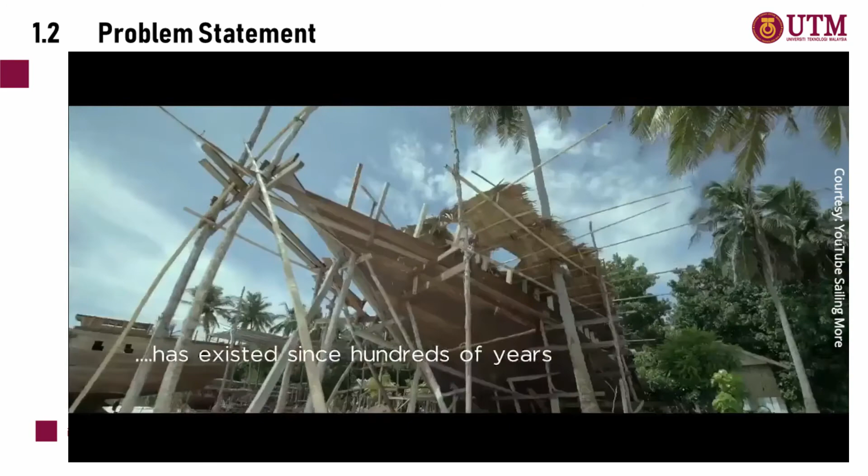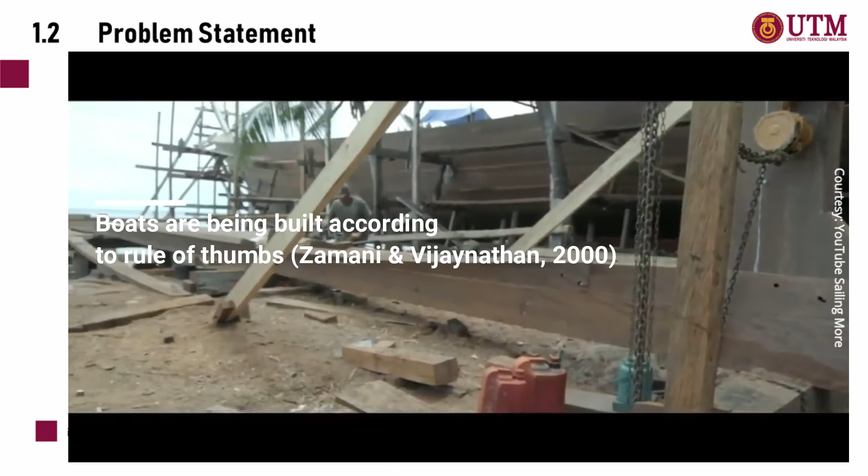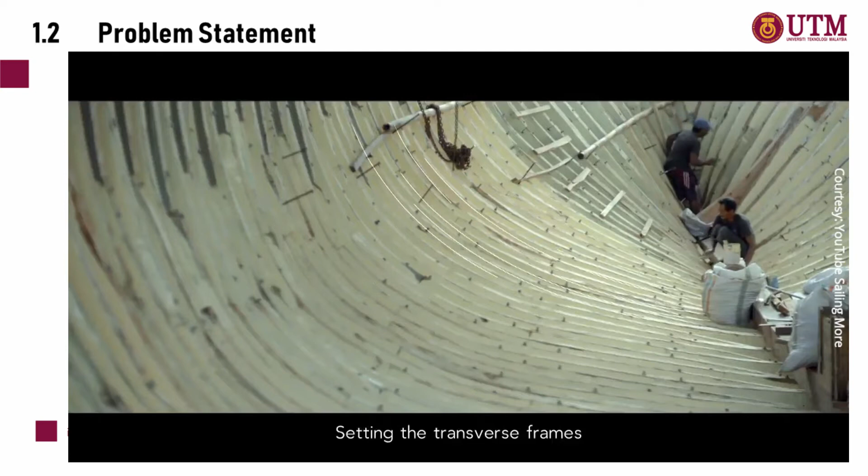In current practice of traditional boat building, engineering calculations are being omitted and the boat will be built according to the rule of thumb. The traditional method does not have any approval nor guidance from any naval architects, and it allows builders to design any vessel freely. Common technique applied by traditional boat builders is that boat frames will only be made after the hull has been constructed and completed. Clearly, this traditional technique may bring failure to the boat's structural strength. In other words, traditional boat building technique is like a trial and error design process.

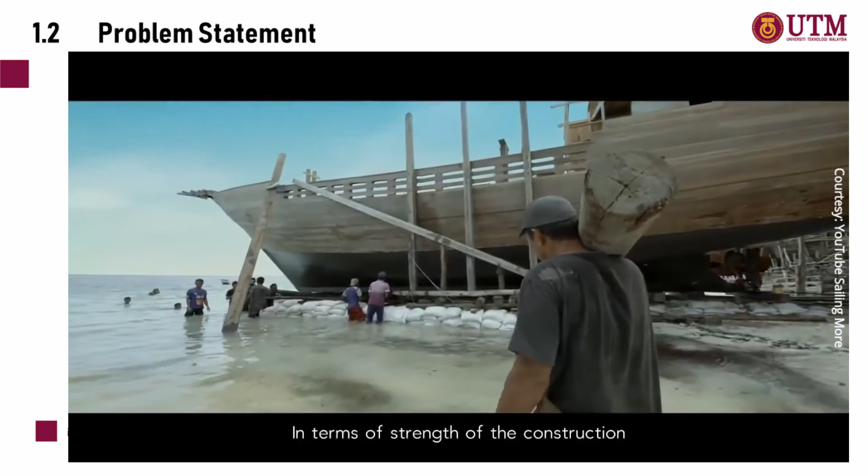Hence, the idea of this research is to propose a simplified method of structural strength assessment for small vessels. The simplified method could then be used to assist local boat builders and boat designers. Based on the previous problem statement, the research objectives are to develop a simple method of assessing structural strength for small vessels and to verify the effectiveness of the developed method.

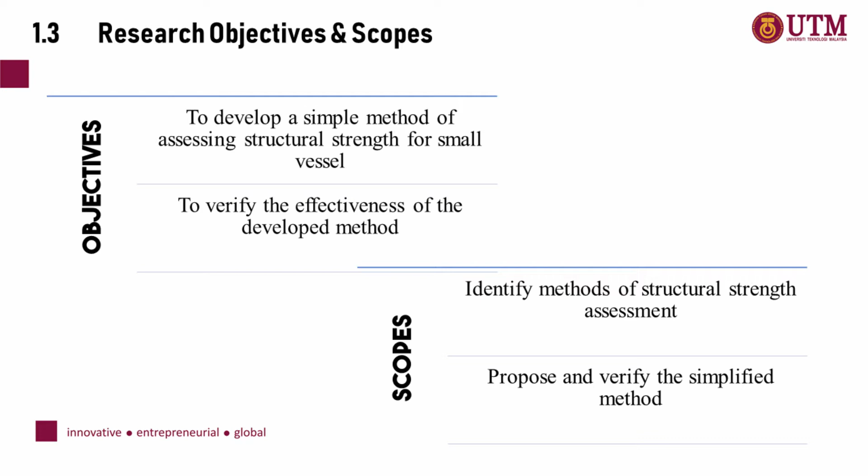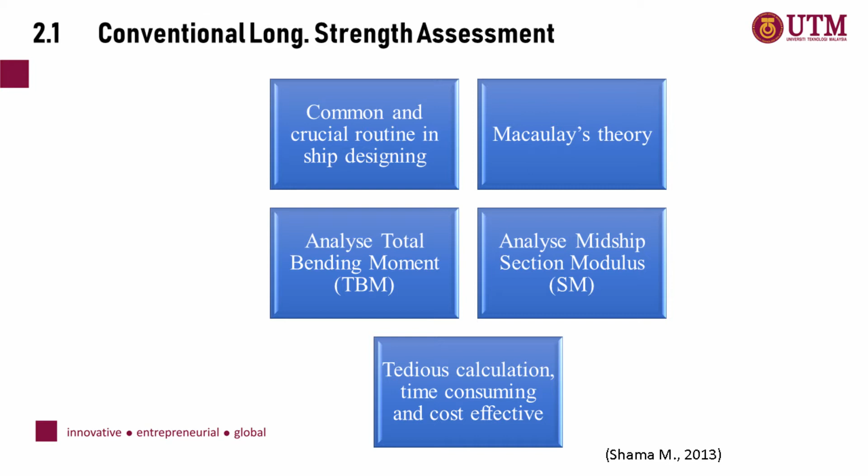The strength assessment is important as mentioned before, and this assessment is a compulsory routine in ship design, especially for large size vessels such as merchant ships. A common theory being used in longitudinal strength assessment is Macaulay's theory, which helps us analyze the total bending moment and the midship section modulus for a ship or a vessel.

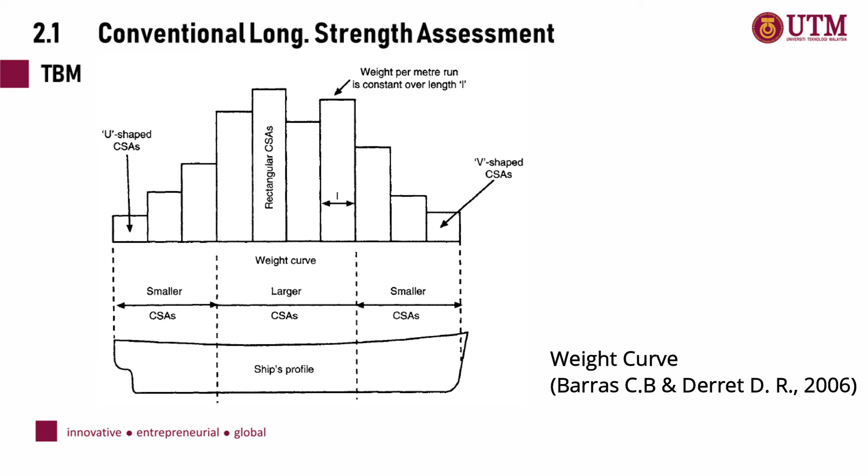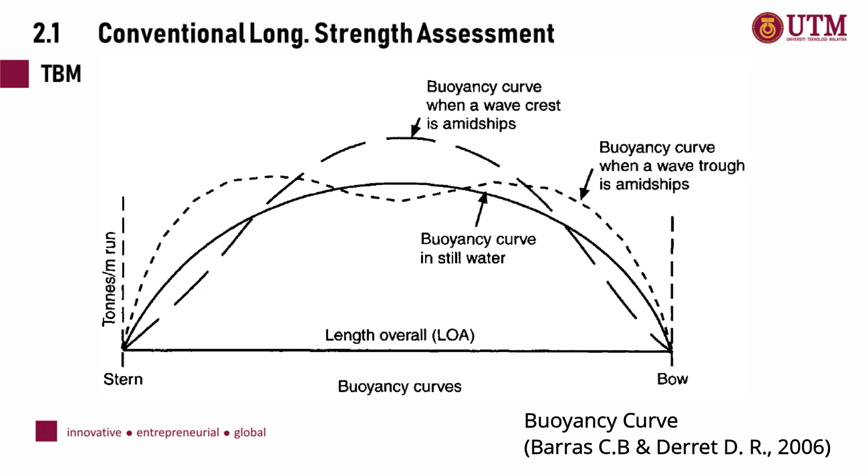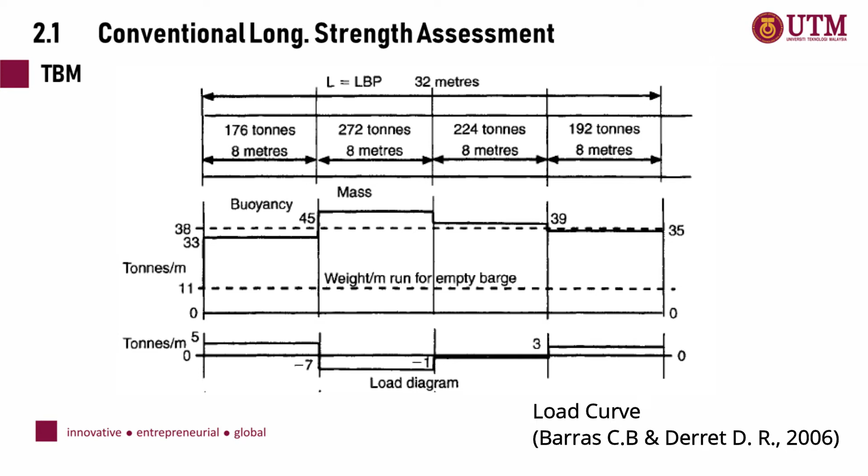In total bending moment analysis, strength curves are very common and each strength curve is strongly related. First is the weight curve, which shows the longitudinal distribution of the weight in the ship. Second is the buoyancy curve, which presents the longitudinal distribution of the buoyancy. Third is the load curve, which shows the difference between the weight and buoyancy ordinate of each section throughout the ship's length. The last one is the shear force and bending moment diagram, where this diagram presents the highest bending moment occurring at a particular ordinate of the ship section.

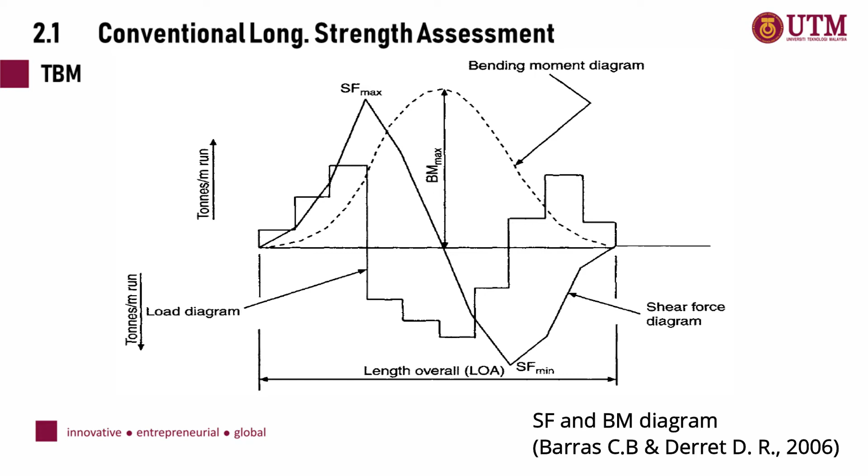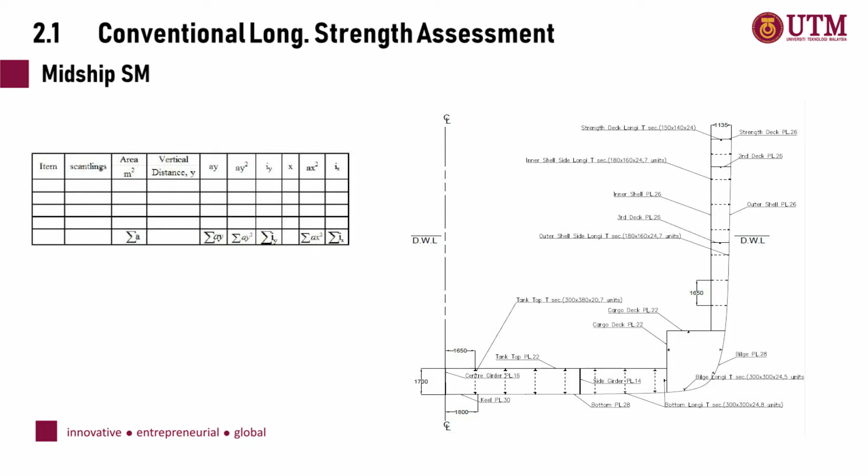After that, to determine the midship section modulus, one must refer to the midship scantling list or midship scantling table. Then, geometrical and flexural properties for each scantling are calculated in order to determine the midship section modulus.

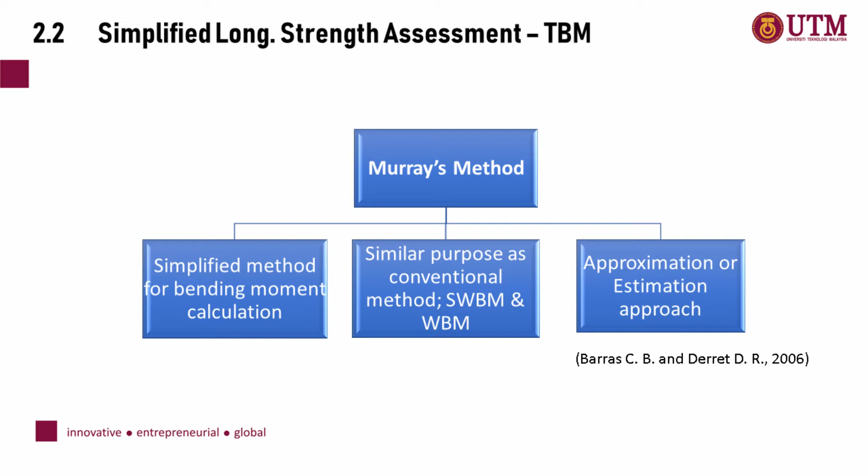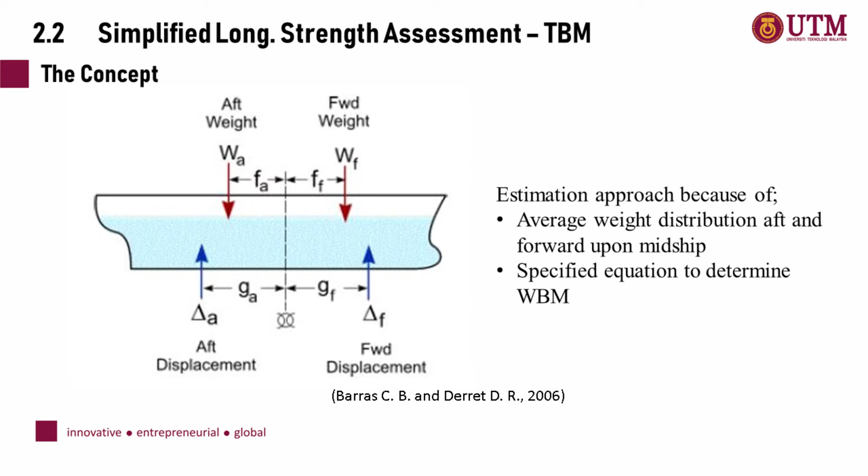We shall now proceed to the simplified strength assessment for total bending moment. Murray's method has been chosen and adopted in this research for the total bending moment simplified strength assessment. It is similar to the conventional method as this method is also used to determine the total bending moment. Murray proposed this method as an approximation method because average weight distribution aft and forward of amidships is used to determine the still water bending moment, while a fixed equation has been developed by Murray in order to determine wave bending moment.

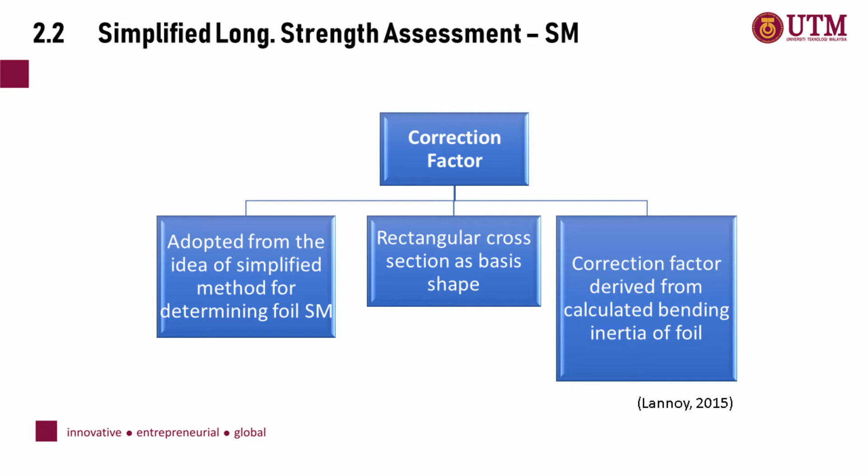Next, we move to the simplified strength assessment for midship section modulus. Currently, there is no simplified method for section modulus analysis. However, research has been done to find hydrofoil section modulus using a simplified method recently. The simplified method has been developed using the correction factor concept. The correction factor is derived from the calculated bending inertia of the hydrofoil. It is presumed that the same concept can be applied to the midship section modulus. Right now on your screen is an overview on how the correction factor works.

The flowchart shown is a quick overview of this research methodology.

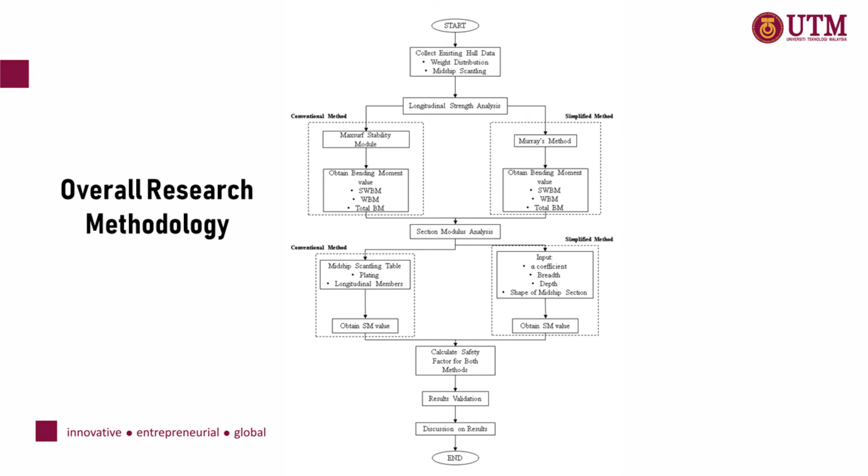For your information, two models were used in this research. First is Model A, which is from an existing hull. The particulars are shown on the screen. Model A is a patrol boat owned by the Department of Fisheries Malaysia, having a 300 horsepower outboard engine. Rhinoceros 5 has been utilized to assist the 3D surface modeling of this model.

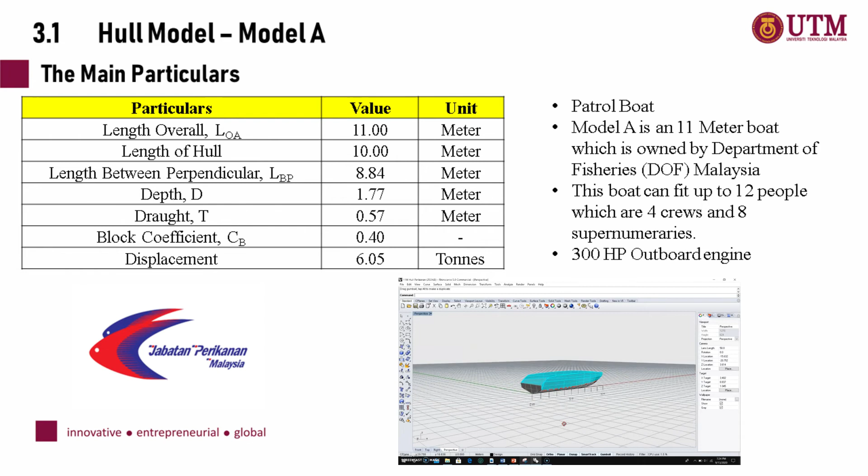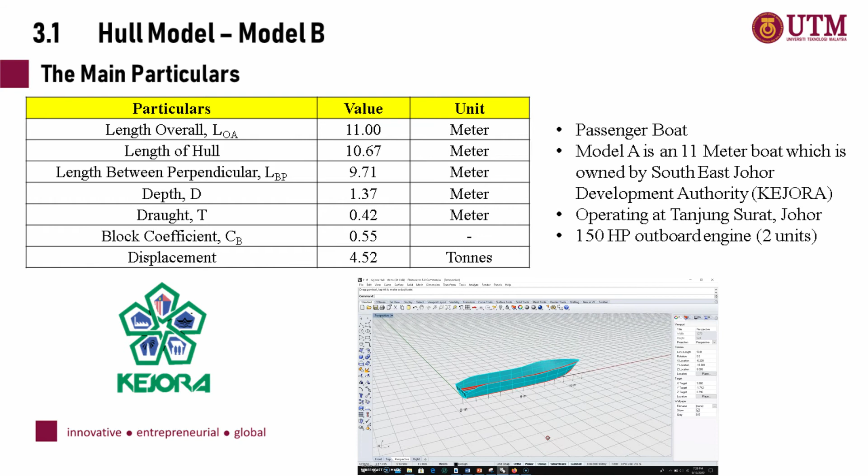Next is Model B. Model B is a passenger boat owned by Kejora, and this boat is operating at Tanjung Surat, Johor, which is located in the Pengerang district. This boat has two units of 150 horsepower outboard engines.

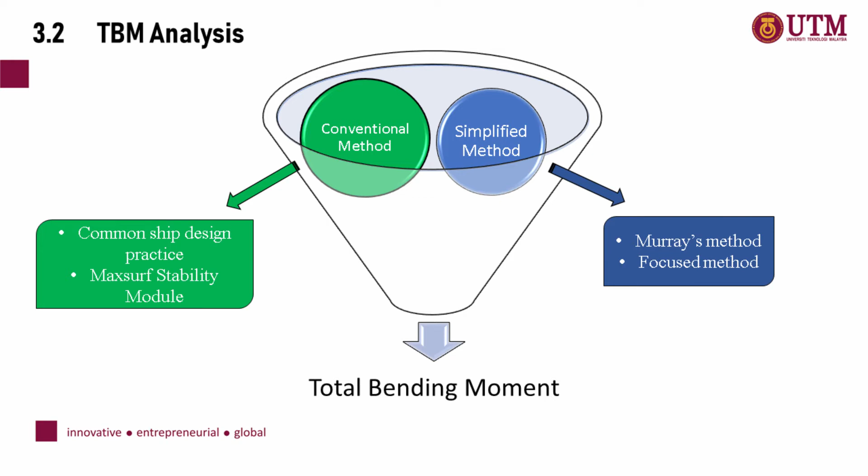In this section, we will be discussing both the conventional and simplified methods used in the research. First is the total bending moment analysis by using the MaxSurf stability module. These are the steps used to obtain total bending moment using MaxSurf stability. Why MaxSurf? It is because this module uses Macaulay's theory in its computation. In other words, MaxSurf stability will be representing Macaulay's method, which is the conventional method to analyze the total bending moment of a ship.

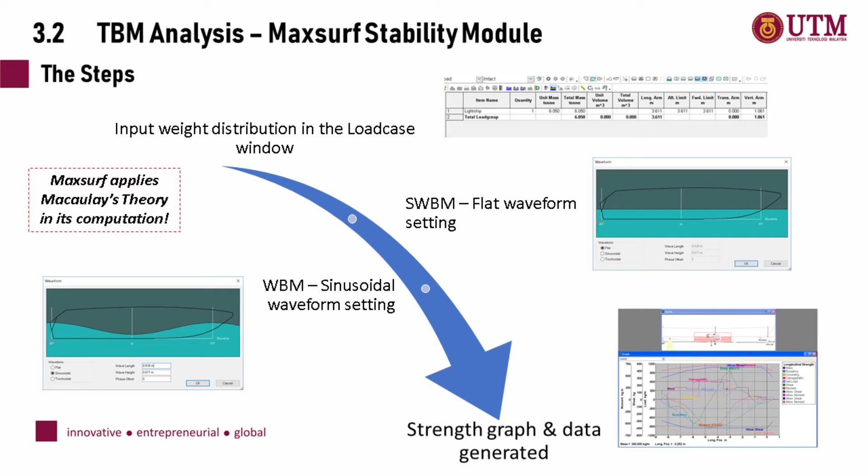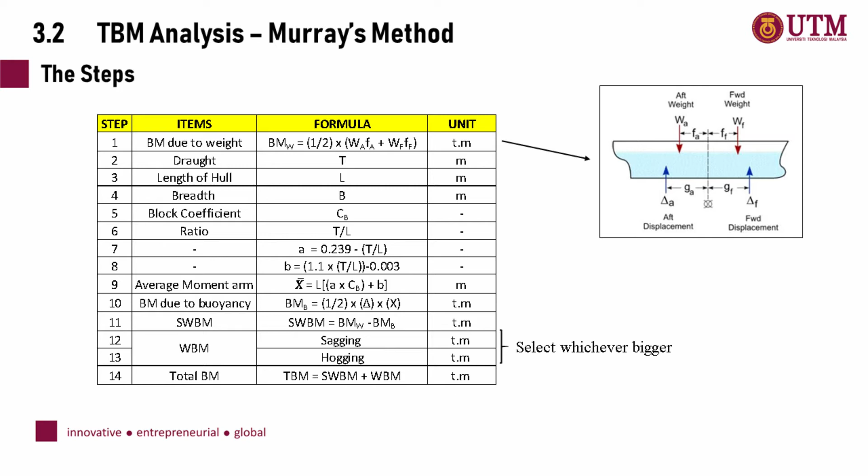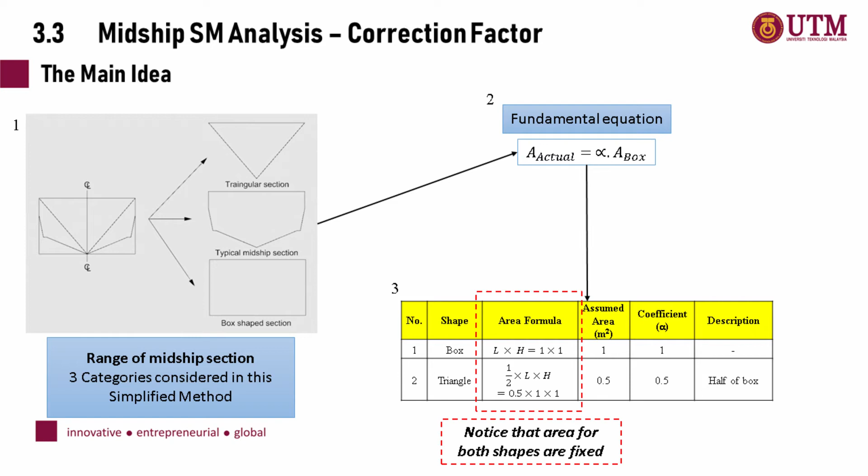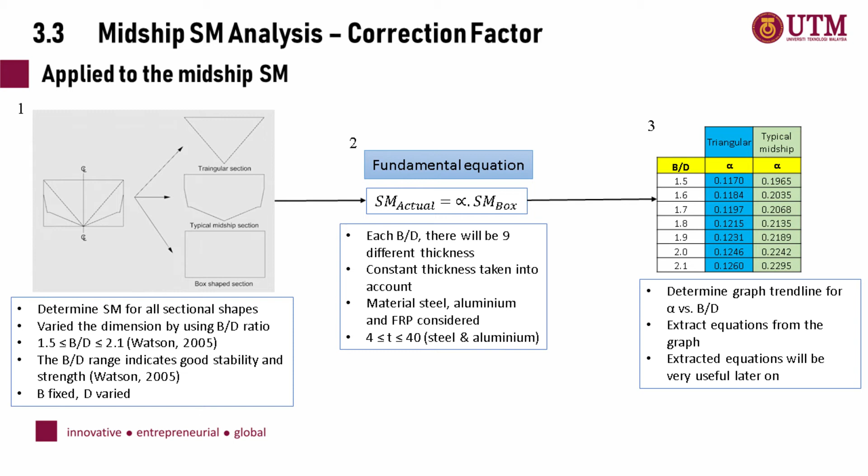The similar concept is now applied to the section modulus, where firstly, section modulus for all section categories is determined. Again, the box shape is the basis shape. Then correction factor, which we shall name alpha, can be calculated using the shown equation. Now we shall relate the values of alpha with the B upon D ratio. From the relationship, equations can be extracted, and these equations are very useful in this method.

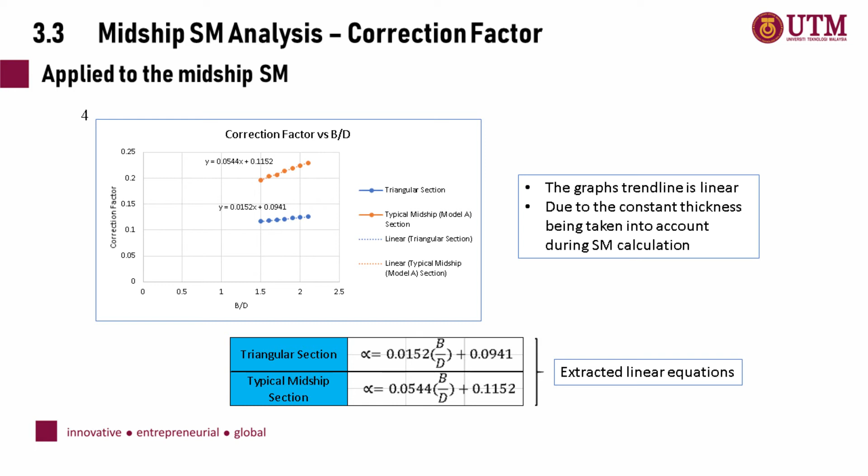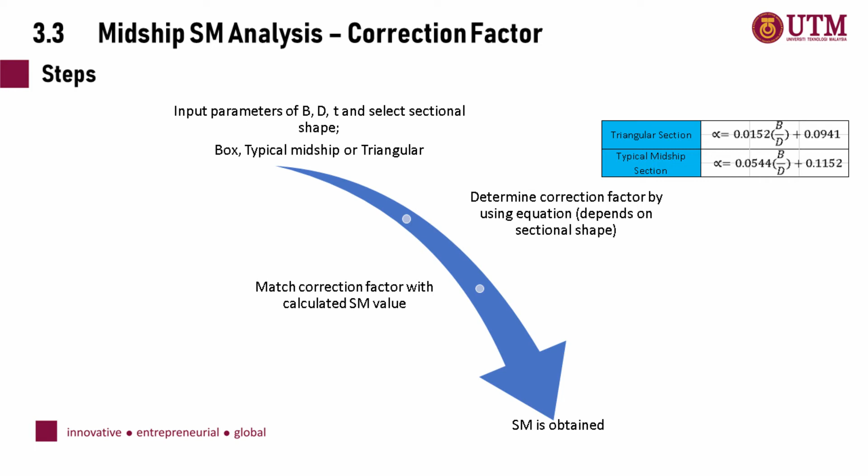On your screen now is the overall steps for this simplified method. First, we input the parameters of breadth, depth, and thickness and select our sectional shape, either box, typical midship section, or triangular section. Then we determine the correction factor using the equations, depending on our sectional shape, either triangular section or typical midship section. Next is to match our correction factor with the calculated section modulus value. And the last one, our section modulus is obtained.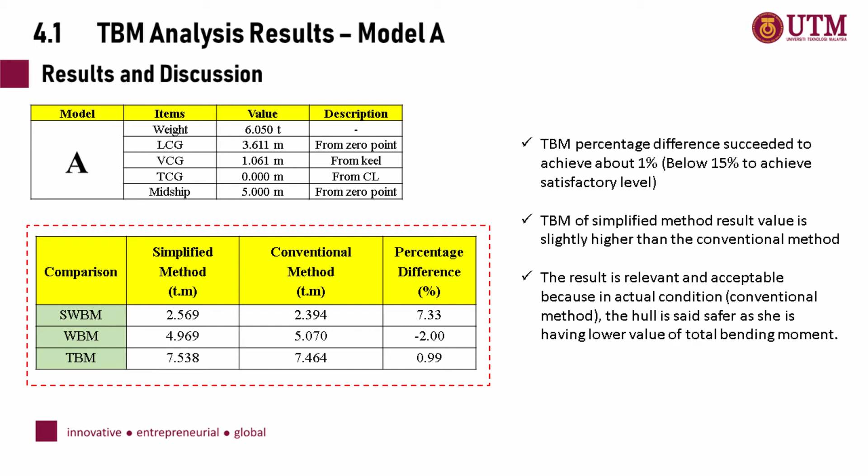This result is relevant and acceptable because in actual condition, the hull is said to be safer as it has a lower value of total bending moment. For model B, total bending moment of the simplified method result value is lower than the conventional method. This result may likely happen as the Murray's method is developed based on an estimation approach. However, we can see that the total bending moment percentage difference achieved 4.05%, which is still acceptable.

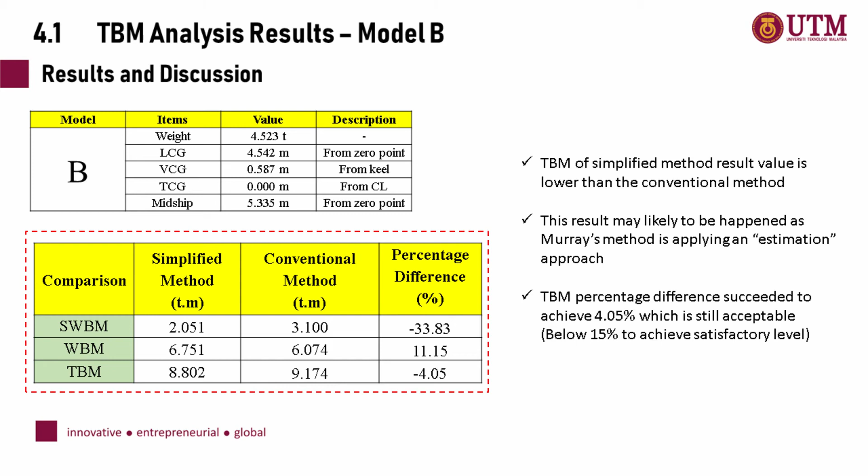Now shall we move to the section modulus analysis for model A? Section modulus obtained through the simplified method is lower compared to the value obtained using the conventional method. This is due to the absence of longitudinal stiffeners. The percentage difference is satisfied, and most importantly, it succeeded to achieve below 15%.

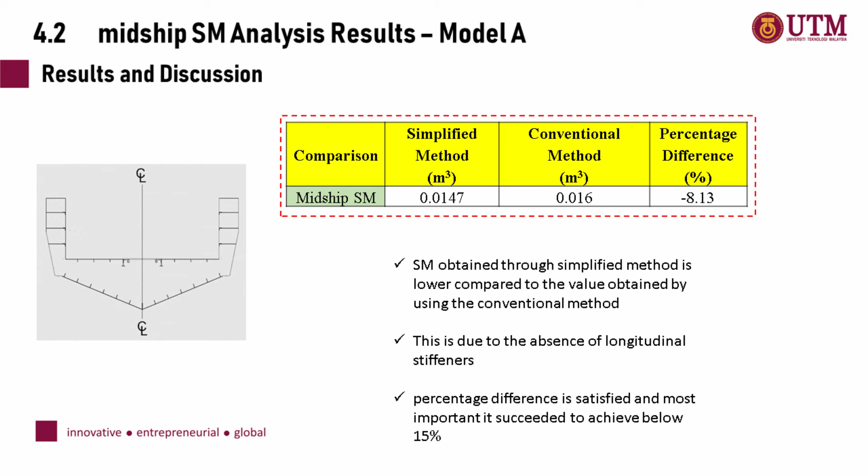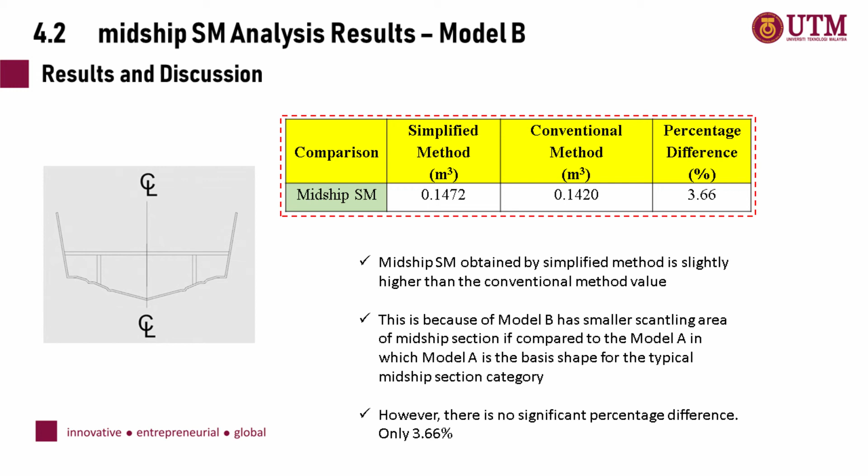Now we proceed to model B. Midship section modulus obtained by the simplified method is slightly higher than the conventional method value. This is because model B has a smaller scantling area of midship section compared to model A, in which model A is the basis shape for the typical midship section category. However, there is no significant percentage difference.

Next is the safety factor analysis. We shall start with model A. Bending stress yielded through the conventional method is lower. This results in the safety factor value obtained by the conventional method being higher. This result is optimistic and robust, as in actual condition the model is much stronger.

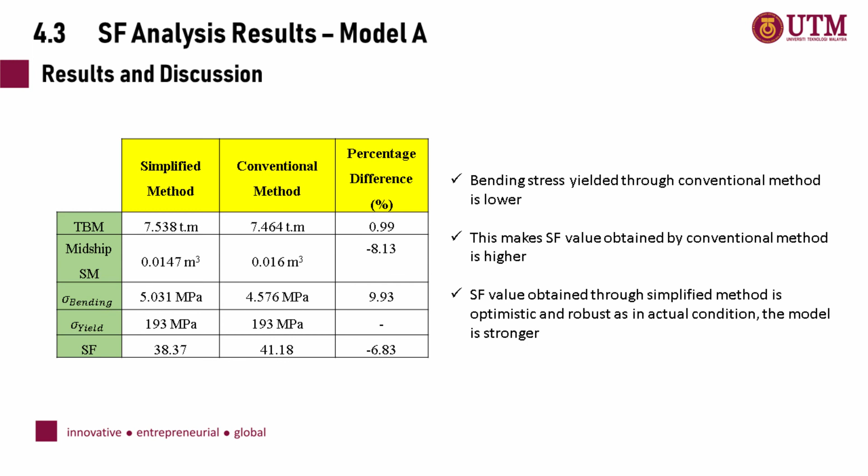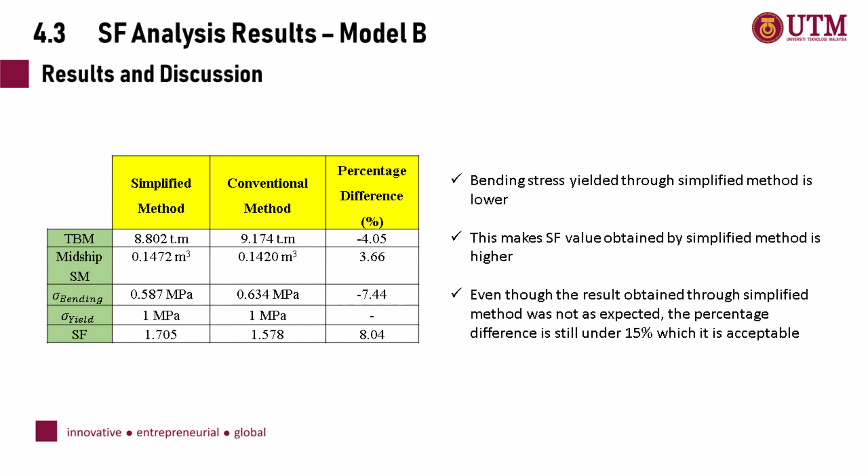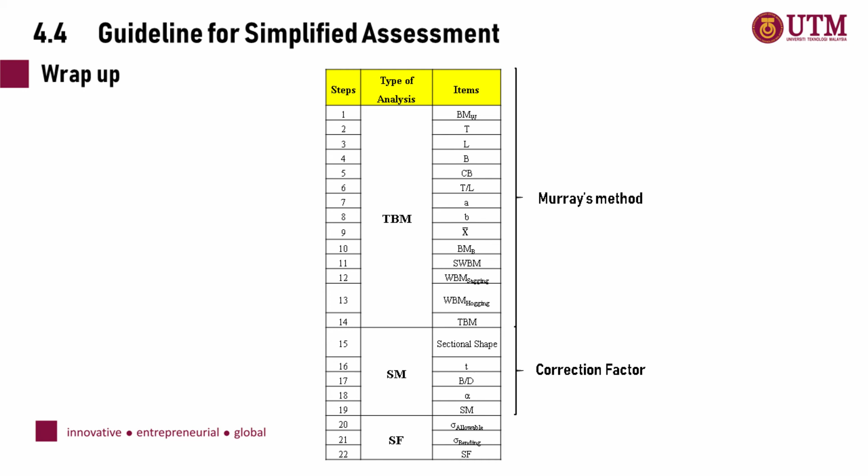Let's proceed to the model B safety factor analysis. The bending stress yielded through the simplified method is lower than the conventional method. This results in the safety factor value obtained by the simplified method being higher than the conventional method. Even though the result obtained through the simplified method was not as expected, the percentage difference is still under 15%, which is acceptable. The table shown on the screen is the overall steps in conducting simplified structural strength assessment.

Alright, now let's proceed to the relevance of the typical midship section category. Is it applicable and acceptable if a hull with chines, for instance model B, is categorized as typical midship section, in which we know that model A with single chine is the basis? The answer is yes. Based on the analysis that has been made, it shows only a 2.04% difference between section modulus for model A and model B.

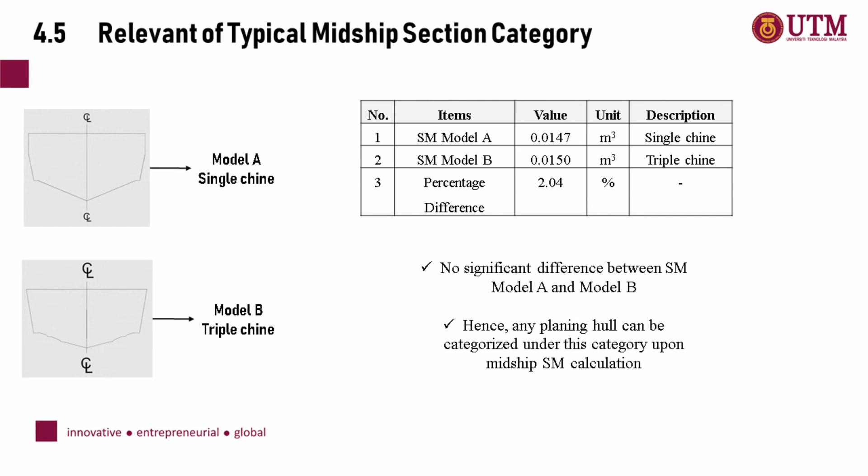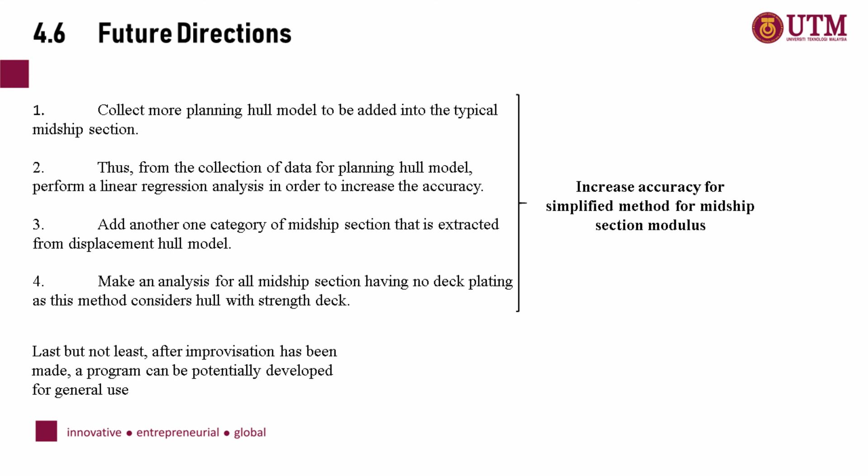Next is to add another category of midship section that can be extracted from displacement hull models. And the last one is to make an analysis for all midship sections having no deck plating, as this method only considers hulls with strength deck.

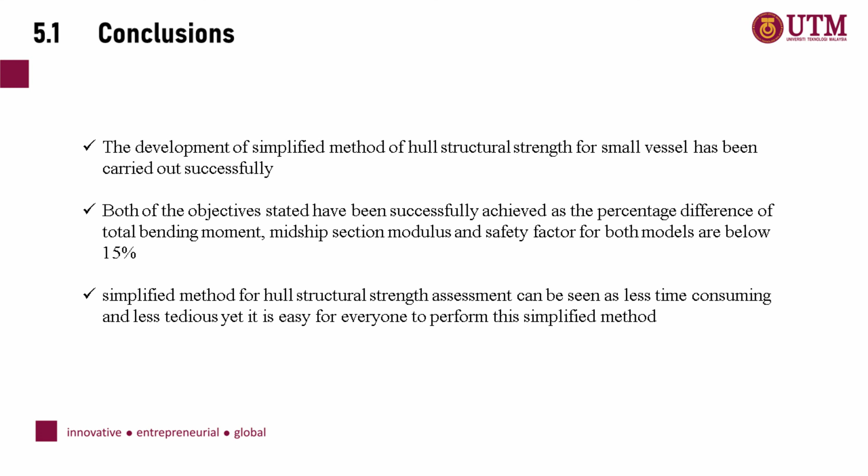In conclusion, the development of the simplified method of hull structural strength for small vessels has been carried out successfully. This is because both of the stated objectives have been successfully achieved, as the percentage difference of total bending moment, midship section modulus, and safety factor for both models are below 15%. Thus, the simplified method for hull structural strength assessment can be seen as less time-consuming and less tedious, yet easy for everyone to perform.